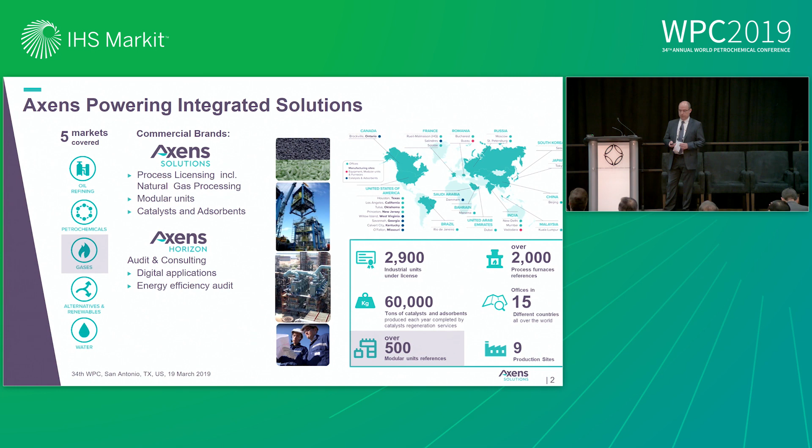It doesn't work anymore.

Okay, so my presentation will be divided in 4 main parts. First, I will give you our perception of the oil and petrochemicals market dynamics and challenges. And then I will elaborate 2 real cases, 2 projects. One is a crude to paraxylene project, which is the Hengli project. And the second one is an upgrading of an existing complex, which objective was to increase the production of the olefins. And I will finish with some food for thought and a few words about the mega trends which are transforming our world, but also our industry.

So let's start with the first point. I will not enter into detail because Léon has already given a lot of details, but what is very important to note is that the fuel demand is really lower than the petrochemical demand. We do not anticipate a very strong demand for fuels due to the incorporation of biofuels, but also due to the electrification of the vehicle fleets and also to the increase of the engine efficiency of all our cars. So we anticipate an increase in demand for fuels around 1% and even below.

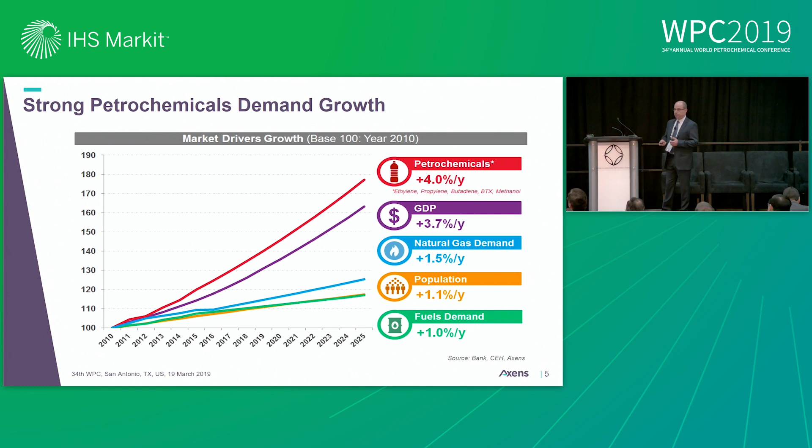So first, I would like to ask you a question, like in a training course. In your opinion, in 2035, how much oil will be required to be converted into petrochemicals? You have 4 possible answers mentioned here, ranging from 10.2 to 17.3 million barrels per day. And I would like to remind you that in 1990, 5.3 million barrels per day of oil were converted into petrochemicals. I give you some additional seconds to make your choice.

Have you made your choice? So the right answer was the answer number 3. Can I ask you if you got the right answer? Raise the hand. Yes. Okay. Could do better, maybe. So it is an answer. It is only an answer.

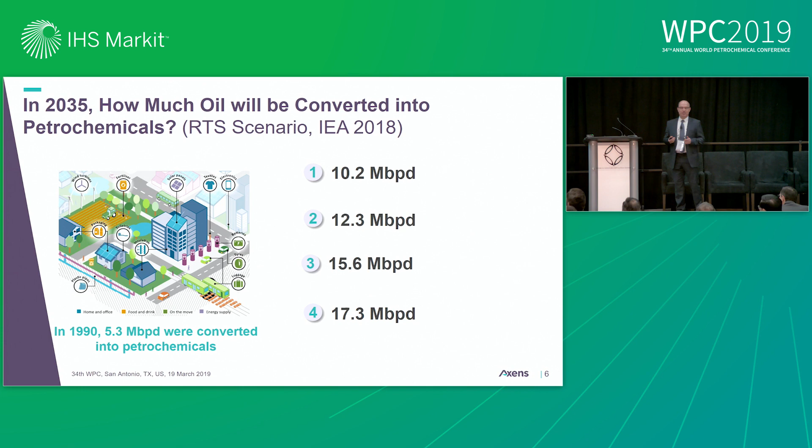And this was coming from the reference technology scenario published last year by the International Energy Agency. So the right answer was the answer number 3: 15.6 million barrels per day will be required for the petrochemicals. That is to say, it is 3 times the quantity converted in 1990. And this trend should continue, according to this scenario, of course.

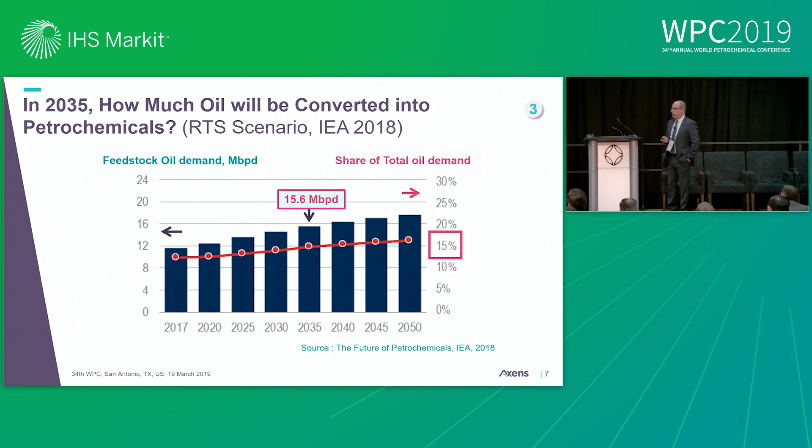So now let's see what will be the incremental demand in crude oil in the coming years. Here we have reported the incremental global oil demand for the future, and we can see that this incremental demand is going to slow down from 11 million barrels per day to less than 3 million barrels per day. But what is very important to note is that the share of the crude oil required by the petrochemicals will increase. This is the green bar, and the petrochemicals will be the first driver of the increase in demand for crude oil, as you can see here.

Now, if we try to qualify what kind of feedstock will be required for the petrochemicals, always according to the scenarios of the studies of the International Energy Agency, it will be mainly naphtha, followed by ethane and LPG. So naphtha is for the production of aromatics, but also for the production of olefins, and the ethane and the LPG can be cracked in steam crackers.

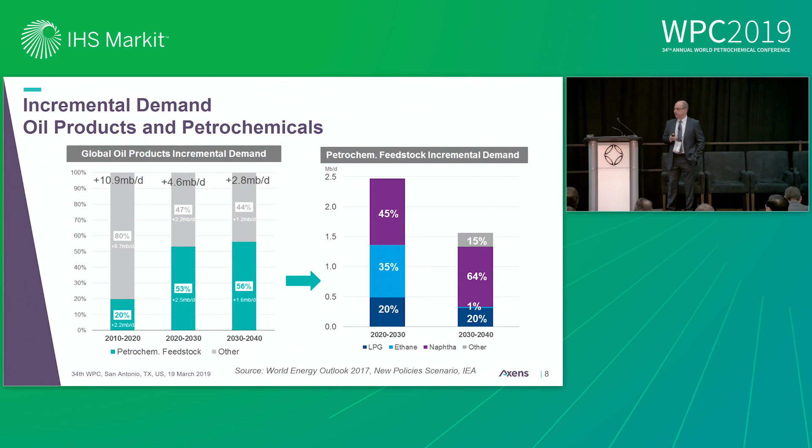So now let me continue, and I would like to elaborate about two what I call case studies, but they are real projects now. And the first one is the crude oil to paraxylene project. This is the Hengli project. This is a very huge project, whose objective is to convert 20 million tons of crude oil, that is to say around 400,000 barrels per day, into paraxylene, but not only paraxylene, because the Hengli requirements were also to

produce high quality fuels, and also some Group 3 lube base oil. So those were the objectives. The feedstock is a mixture of Arabian Heavy, Arabian medium, and 10% Marlim, which is a very heavy crude with an API degree of 22. So the product requirement was to maximize the quantity of heavy naphtha produced in order to maximize and optimize the paraxylene quantity that can be produced by this complex.

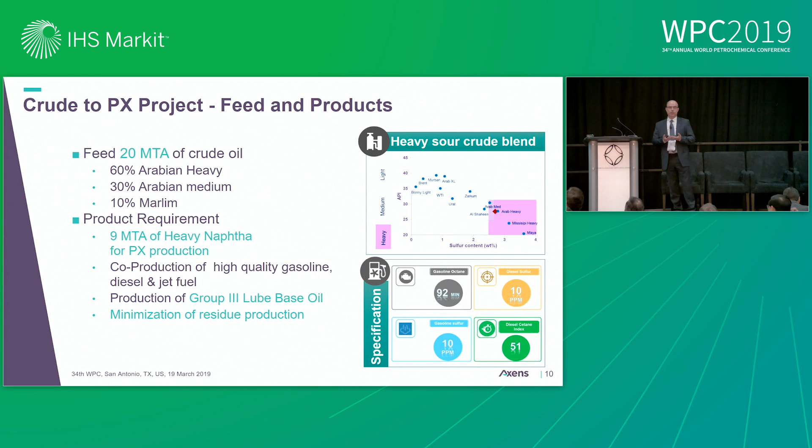All the fuels that are going to be produced by this complex are meeting the China 5, China 6 specifications. That is to say, the sulfur content is less than 10 ppm, and for instance, for the diesel, the cetane index is higher than 51. So one of the prerequisites of this complex is to minimize the quantity of the residue remaining. So you have to convert deeply the vacuum residue in order to take advantage of this low value vacuum residue and to transform this VR into high value molecules such as paraxylene, but also fuels in this case.

So now this is the scheme which has been selected, and I am going to try to give you an explanation about this scheme. So all the heavy naphtha streams are in purple. So the objective is to maximize the production of this heavy naphtha, which is required by the aromatic complex. And you can see that, of course, the straight run heavy naphtha coming from the atmospheric distillation unit is taken and sent to the aromatic complex.

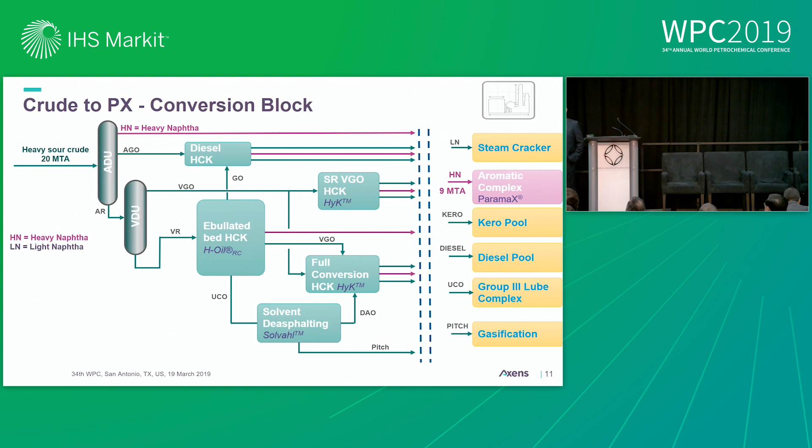And in order to push the production of the heavy naphtha, we have especially designed a diesel hydrotreater hydrocracker unit, whose objective is to convert the gas oil heavy molecules into naphtha with a high selectivity. And then you have this purple stream going to the aromatic complex.

Now, if we move to the bottom of the barrel, we can see that the straight-run vacuum gas oil is hydrocracked in what we call a straight-run vacuum gas oil hydrocracker, whose objective here is to produce the middle distillates, high-quality fuels. That means mainly the jet fuel and the diesel streams. This unit is also going to produce, to a lesser extent, some heavy naphtha, which is recovered.

Now let's move to the core of this scheme, which is the conversion of the vacuum residue. This vacuum residue, which contains the heavier molecules presented by Léon, is difficult to crack, and we need hydrogen. So this ebullated bed hydrocracker is working in presence of high pressure hydrogen, and is able to convert these big molecules into lighter molecules, such as gas oil, which will be treated in the diesel hydrotreater hydrocracker unit in order to produce heavy naphtha. Some heavy naphtha is directly produced and will be recovered to be processed in the aromatic complex.

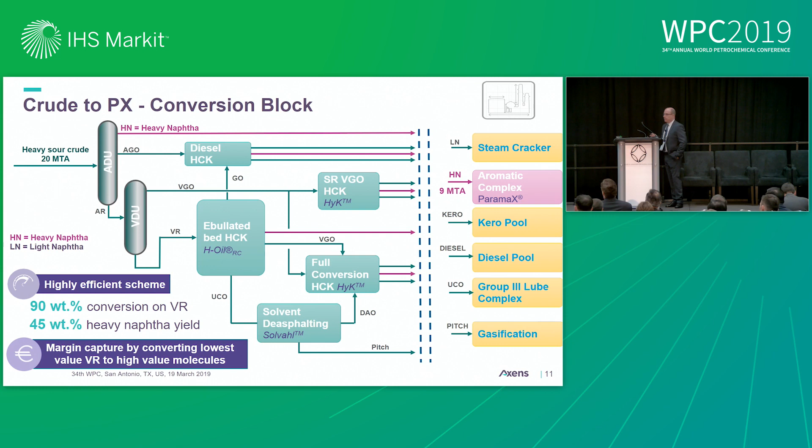Okay, now let's say a few words about the ebullated bed technology. So the H-Oil, the ebullated bed hydrocracker unit, is a hydrocracker working under hydrogen pressure, as mentioned also by Léon. And the catalyst is maintained in an expanded bed thanks to the recycle of the oil with a pump, which is indicated here.

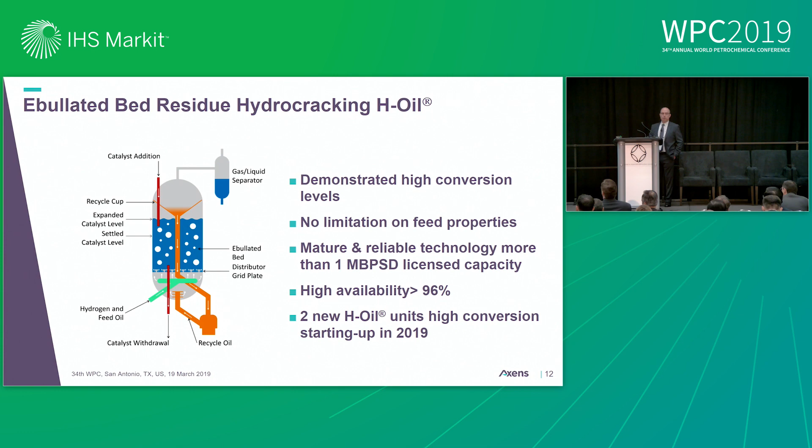So the conversion is maintained at a steady level thanks to the injection of fresh catalyst and the removal of the spent catalyst. The injection of the fresh feed and the hydrogen is made through the grid and the pipe in green. So this is a well-demonstrated technology. This is a mature and reliable technology, and it presents high availability. That is to say, it's able to work with an availability rate above 96%, which is very important for the economics of the complex.

Okay. Now, a few words about the aromatic complex. This is a very huge aromatic complex, probably one of the world's largest paraxylene complexes. So the full range naphtha is hydrotreated. It contains contaminants, sulfur, for instance, that need to be removed. So this full range naphtha is hydrotreated in the presence of hydrogen and a specially designed catalyst.

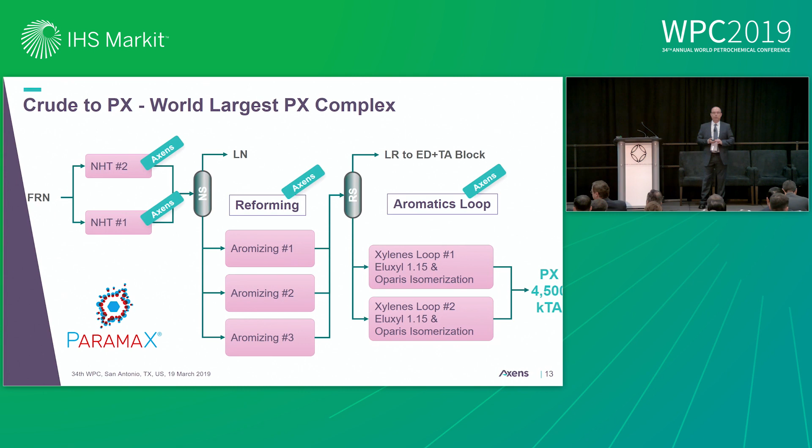The light naphtha is recovered and sent to the steam cracker, while the heavy naphtha will be sent to three reforming units, 3 trains of reforming units in parallel, in order to produce the aromatic molecules, mainly benzene, also toluene and xylenes. Then you need to separate all these molecules and to optimize the production of the paraxylene, which is done in 2 trains of aromatic loops in parallel, which are able to produce 4.5 million tons per year of paraxylene, which is very, very huge.

Now let's move to the second case study I would like to share with you. And this time we are in South Korea. The refinery is S-Oil. And the context was the following. It was a major expansion of an existing complex. And the feedstock here is a mixture of Arabian Heavy and Arabian Light, like in the previous one. And the objectives were different than the previous case.

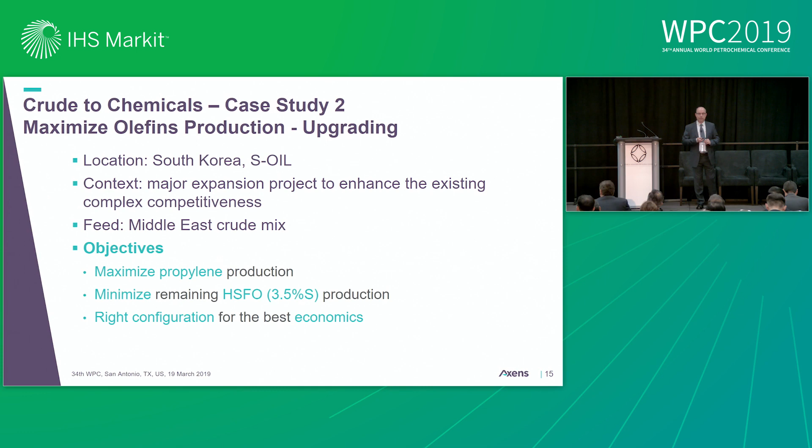The first one was to maximize the propylene production and also to minimize the remaining heavy sulfur fuel oil, which contains up to 3.5 weight percent of sulfur. That means that it's very important to decrease this heavy sulfur fuel oil, because it has a very low value, and also because the International Maritime Organization has set a new specification limiting the sulfur content to 0.5. So the market for this heavy sulfur fuel oil is going to disappear. And of course, the objective was to select the best configuration to improve the economics.

After several workshops with S-Oil and some different configuration studies, we came to the conclusion that the best option would be to process separately the atmospheric residue and the vacuum residue. And this is the scheme which has been finally selected. So you can see here that the vacuum residue is going to be treated in the existing residue hydrotreating unit, whereas the atmospheric residue is going to be processed in an atmospheric residue desulfurization unit and then sent to the high severity FCC technology. I will tell you a few words about this technology.

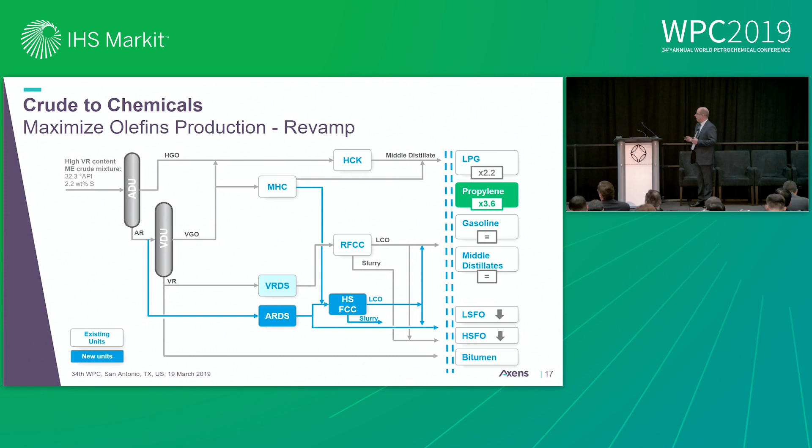Okay, so now let me say a few words about this high severity FCC technology, on which this innovative scheme is based. So this is an FCC technology, but unlike classical FCC technology, this technology, which has been developed by Saudi Aramco, JX, TechnipFMC, and Axens, is equipped with a downflow reactor. So why use a downflow reactor?

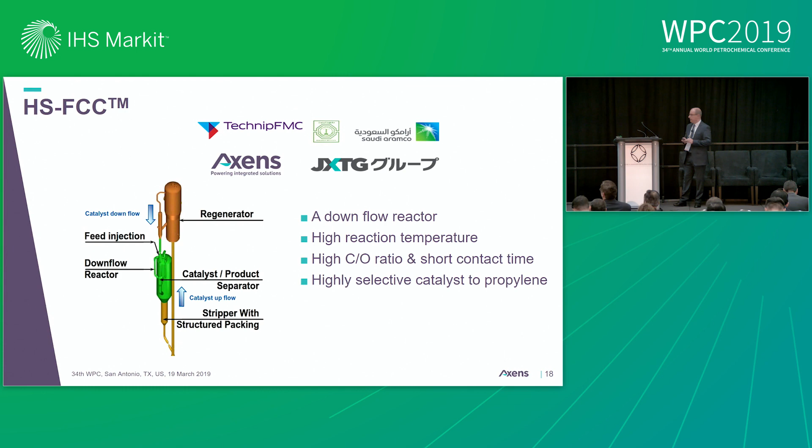What is very important in this case is to limit the contact time inside the reactor in order to avoid hydrogen transfer from different molecules inside the FCC unit to the olefins. Because if you have this hydrogen transfer, you are going to saturate the olefins and you are not going to produce the right products. So you need a short contact time, you need a high, what we call, cat-to-oil ratio, that is to say to increase the quantity of catalyst, to push the conversion, and to use a higher reaction temperature. Doing that, you are able to reach the targeted level of propylene production.

Here there is a comparison of the product slate in the initial configuration and in the new configuration. You can see that there is an increase of the propylene production, and the propylene yield from the atmospheric residue, that means the bottom of the barrel, is 18%. There was a minimization of the fuel oil, which has the lowest value, and the maximum liquid yields with no increase in the production of fuels, which corresponds to the market demand.

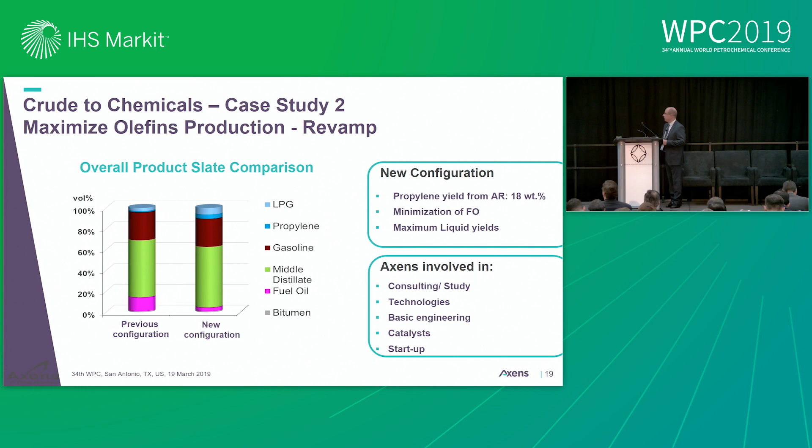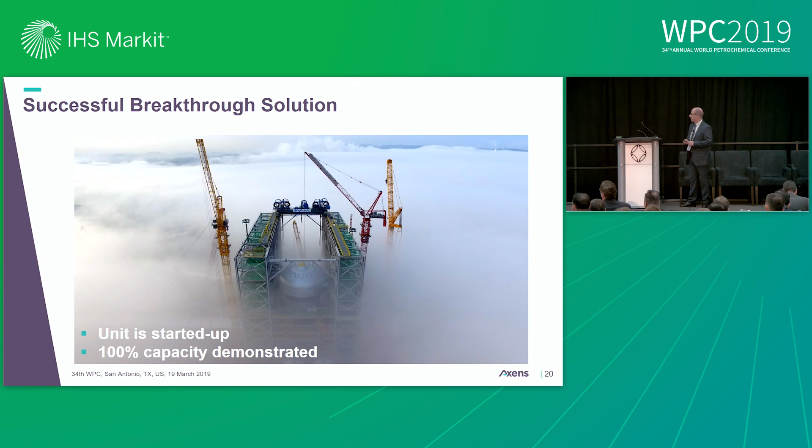In this case, Axens has been involved since the beginning, from the initial studies up to the startup. The unit has been started up, and 100% capacity has been demonstrated. Here is an impressive picture during the construction of the HSFCC unit. So I would like to have 2 or 3 minutes to give you a conclusion before elaborating about the future megatrends.

So petrochemical demand is growing higher than the fuels demand. That's for sure. Crude oil to chemicals complexes are offering many advantages for those who are investing in this project. It expands into a higher growth market, as indicated. You are also able to mitigate risk related to raw material and product price variations. You are betting on 2 different markets. But one solution doesn't fit all. You have to study case by case. Each case is specific, and tailor-made solutions have to be defined.

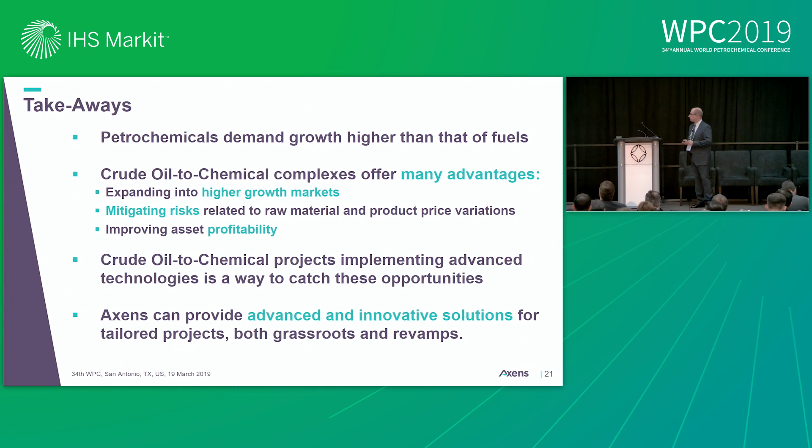The second one is climate change and energy transition. This is also very important. The integration of biofuels or the electrification of the vehicle fleet is coming from this energy transition, especially in Europe. We have regulation about that, and the energy efficiency of the engines of our vehicles is also improving year after year. What I would like to point out now is the aspiration for a better quality of life of an increasing part of the world population.